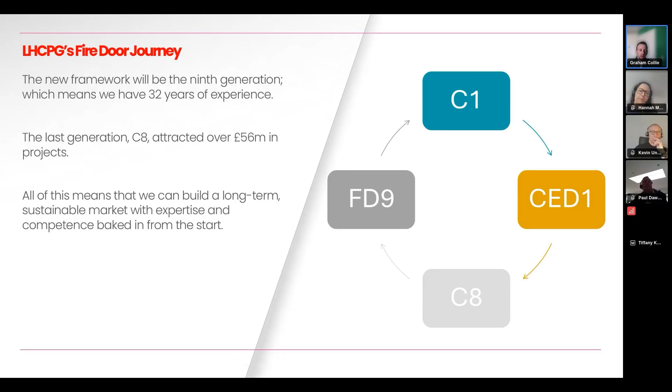Finally, before I hand over to Paul, it's been a journey with this framework. We started the tendering process in September, but as Paul will allude to, there's been some hand-holding required. So we're a little behind schedule, but we're currently going through factory assessments. That sets us apart - we actually go to the factories of all the manufacturers that apply to our framework to check they're doing what they say they're doing. We're one of the only framework providers that do that as well. So we're completing that.

This framework launches in July, so we'll have a new compliant route to market for all the needs from that side of things. So that's it for me. I'm going to hand over to Paul, who's going to take you through a little bit more of the journey on the technical side. Thank you very much.

Thank you, Graham. My name is Paul Dawson, I'm Group Technical Manager at LHC Procurement Group based in Uxbridge. As Graham has already alluded to, we have our regional business units, which ultimately support our clients and contractors within those regions. Just a brief history of myself - I'm still involved in skills and standards development, education and lecturing, and I'm still out there doing contracting as well as working with LHC Procurement Group developing our construction frameworks.

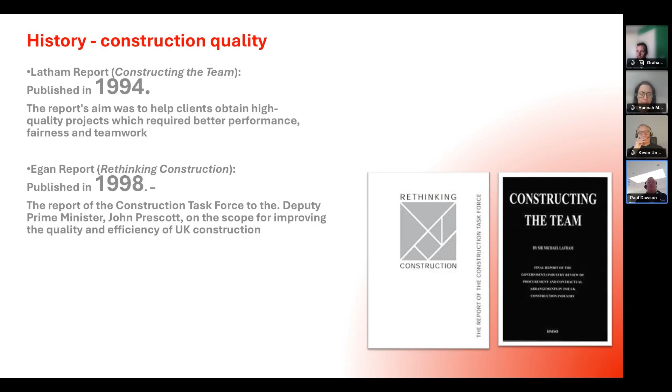So a bit of history on construction quality. Anyone who's done anything academia-wise within construction will remember the Latham reports, the Egan reports, and obviously the outcome from Grenfell. There's a common theme that goes through all of these, and every time it's quality, quality, quality, quality. The industry could do better, we could collaborate better, we could be more transparent - it's just a common theme that goes through. But the two I've mentioned, the Latham report and Egan report, go back to the 90s, which is a chunk of time ago.

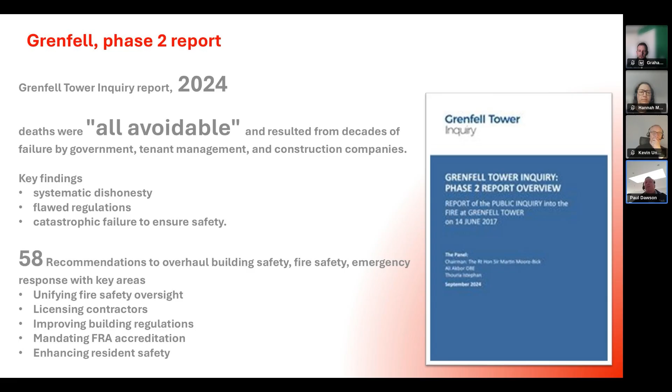Grenfell, as I've just mentioned, the phase 2 report outcome was that everything was avoidable. There were 58 recommendations that came out of the report, looking at improvements within the industry, improving regulations, mandating fire risk assessments, accreditations, enhancing safety. And then there were the key findings: systematic dishonesty, flawed regulations, catastrophic failures to ensure safety. Hopefully, as I go through some of the slides and the other presenters are here, we can talk about what we are doing to change this and make sure it's a quality-driven, safe industry.

The Building Safety Regulator was established after Grenfell to look after safety in high-risk residential buildings. That has now kind of moved from HSE ownership into a separate management, but it's there in order to ensure safety moving forward.

The C8 and FD9 ethos, Graham's already alluded to how we've evolved our products over the last 32 years. We look at within our fire doors, certainly on the FD9 framework, we look at the full 360 review of not only the products, but also of the installers. So we are the only framework provider that goes out to look at manufacturing processes.

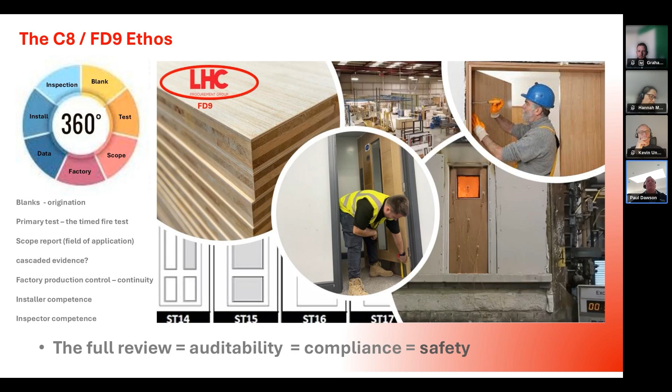So as I say, we look at the full sourcing of the products, make sure they're manufactured in accordance with the accreditation agreements, make sure that we have a compliant door set that comes out the factory, but also looking at the competency and qualifications of the installer, bearing in mind that the installer's third-party accreditation is separate to the manufacturing accreditation, so we look at that as well.

The questions, if it all does go wrong and you're in the court, you will be asked these questions. Did you know about the golden thread? Do you have accurate data? Can you trace the auditability of your products? Are you aware of the deviation from scope of the products? Why do you accept the use of another's accreditation, etc.? The list goes on, and you will be expected to answer these questions.

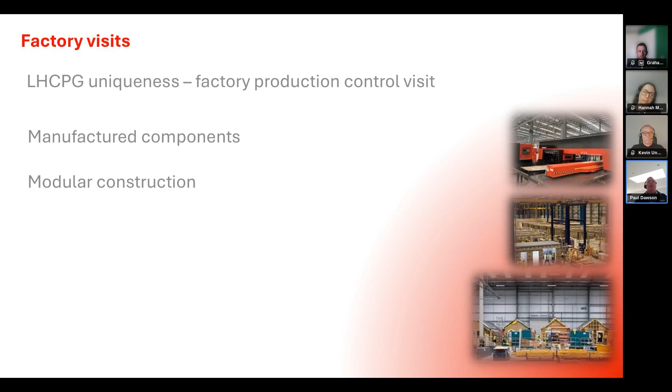As I mentioned, the factory visits, we've been out, we look through the factories, we ensure compliance of the products against the approvals that they have. We look at the quality management, the safety, and ultimately make sure that when a product goes out of the door of the factories, all the component parts are as the tested door assembly, and they're not mix and matched, which could give rise to early failure.

We check for unauthorized modifications. We verify the hardware compatibility. We look at the certification, the labeling, the traceability, the integrity of the products, the glazing, the aperture size, and training, and we match all of that against their field of application scope assessments and documentation for the products that have been approved.

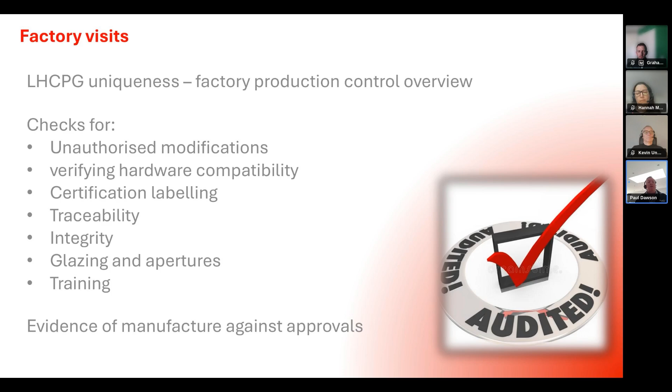A quick little list of what we look at. We look at the sustainability, traceability, responsibility. We look at consistency of the build quality to make sure that the door assemblies or door sets that come out of the factory are the same any day of the week, any time of the day, any time of the month, any time of the year. They're all built to the same quality standard and approvals.

And we also look at gateway processes to make sure that where we do walk through a factory, if there is anything - say a CNC machine is a little bit out of calibration, and the locking mechanisms or the spy holes or something is not quite right - it is absolutely picked up and quarantined and taken off the production line, so the manufacturer doesn't put not-to-standard door sets out there on the market.

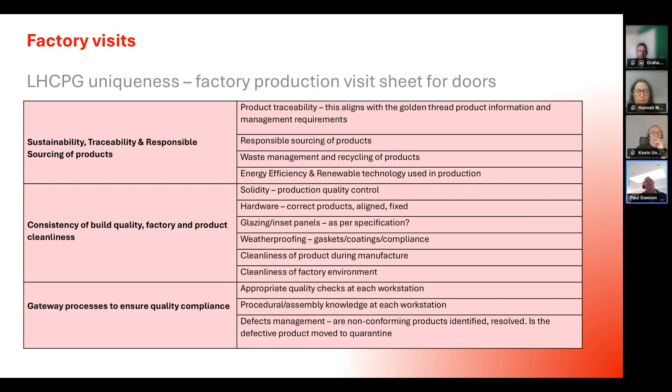Contractor competencies I've run over. We look at the skills, experience, knowledge and behavior. Behavior is a big one. We look at the organizational capability, the technical proficiency, the management systems, the compliance. We look at change management compliance and ethical conduct. A lot of the contractors have been with us for a good number of years now, and going back to the gold standard, we build those collaborations, and that's how we can move forward with improving quality.

Forms of compliance, how do we check it? We look at declarations, certifications, accreditations. We make sure they're in date. We make sure they're third party endorsed. We look at information statements, records. We look at reporting plans. We look for, as I mentioned earlier, gateway compliance. We look for change control, management structures, and probably one of the big key ones is subcontractor management as well, to ensure that everything is appropriately managed and quality remains forefront. And obviously third party audit and inspection evidence is absolutely key as well.

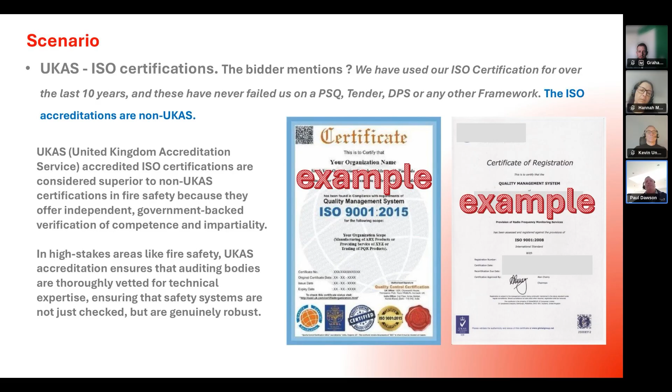Scenario here: I need some fire doors fitted. We've got the golden thread of information, and we need to know the whole history of those products. We need to know, as I say, the sourcing right the way through to any alterations, installations. We need to know all of the data, all of the time, within those products that are installed. So we do take these requirements seriously, and you absolutely need manufacturer test reports, data sheets, third-party certification for fire doors, etc. We need to know, or we will assess the products and make sure that you are getting what you're paying for.

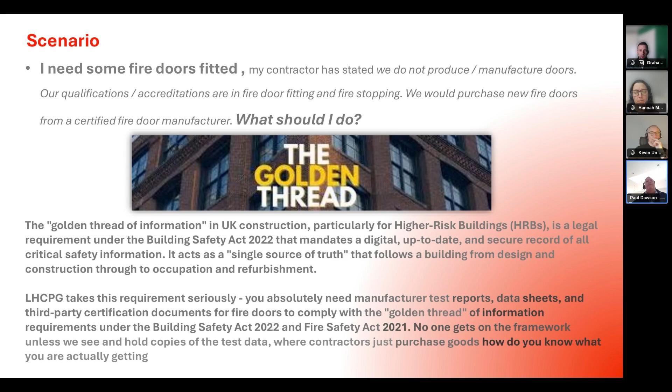A scenario here, I've got a certificate from a contractor. These are real scenarios that we're having when doing this evaluation for our fire door framework. They've stated that as a Q-marked approved fire door installer, they are audited biannually, and their certificate is awarded based on meeting the BM TRADA requirements.

Every scheme is granular. There's a couple of standards here. The STD 052 is the fire door installation standard, but the 058 is the third party inspection and maintenance. They're separate, so it's not just a case of having a certificate and being able to do anything - it's individually certified.

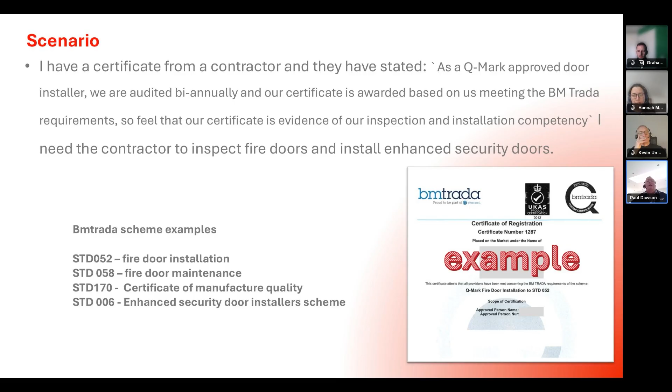Another one here, the contractors have provided this primary test evidence for fire doors. This effectively is a field of application, and it will cover a whole raft of products. When you read through, this is an engineering assessment that the products' expected fire performance will comply - it's not primary test. This is again what we're getting in place of primary test, so we throw these back and say no, we want the primary test.

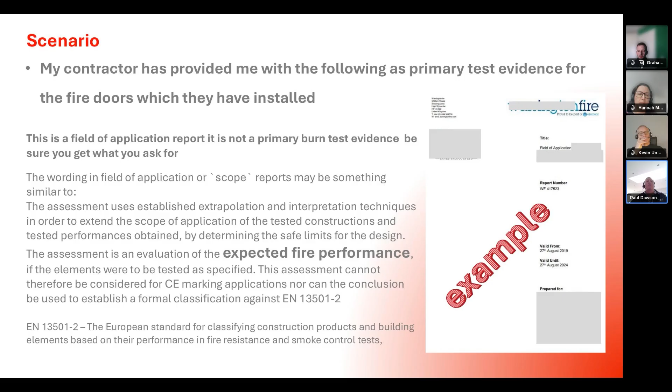Closing thoughts - LHC goes through a rigorous, robust process to ensure that the products you get with your fire doors are what they are, and will serve the purpose over time. But we do an audit assessment up to a moment in time, up to when they're appointed on the framework. We can support with call-offs and projects if asked, but as a client, you also need to take some ownership from when those contractors are on site, to make sure all the good work we've done continues through on the install.

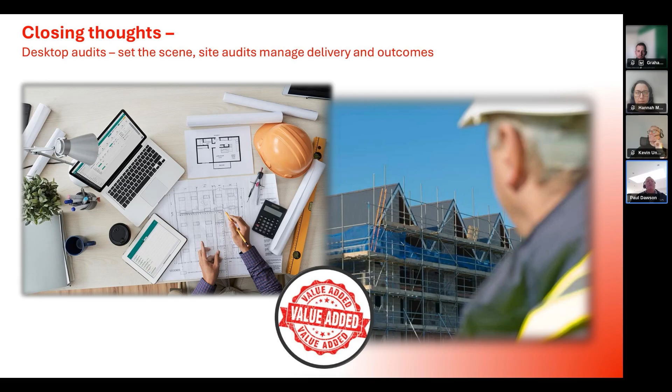And on closing thoughts, the Building Safety Act has basically changed the rules of the game. It's not about what you can do now, it's about what you can prove. We're here to help you through this compliance headache. And that's my slides, and I shall now hand over to Hannah.

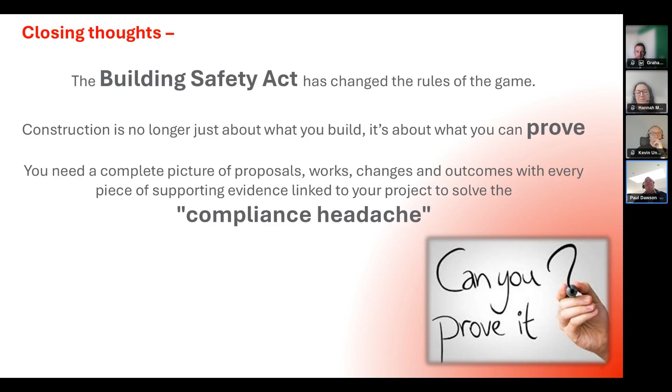Hello everyone, my name's Hannah Mansell and I'm a design engineer, but I've worked in the fire door sector in many different guises - product design, testing, getting products certified, etc. I run a consultancy called Adorability, and I'm also facilitator for the UK Fire Door Think Tank, which is a not-for-profit all about collaborating and looking to future-proof safety within the sector.

So I've got some questions for the audience to start off with. My job here is to illustrate some of the themes that Graham and Kevin have been speaking about. But four questions for you first. The first two are to consider where we are now and to look back - what impact do you want to have within your work? And if you were to fast forward 30 years, what sort of legacy do you want to leave within the building safety landscape?

And the next two questions, cast your mind forward. Let's consider future innovations and maybe the new materials starting to emerge in the fire door world - but what do they mean for the next area of emerging risk or focus for the industry? And then looking at the whole building safety landscape - what's keeping you awake at night? What worries you most? And what collaboratively could we do together about it?

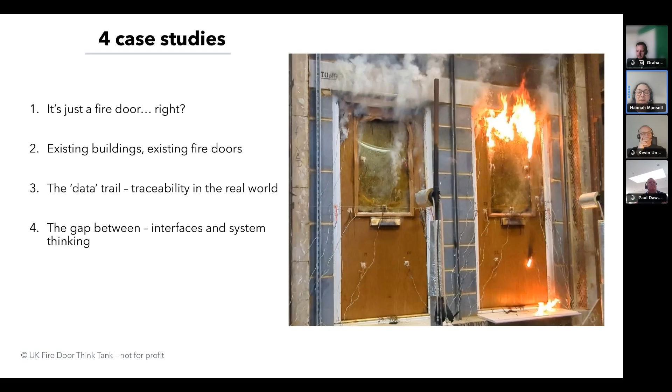So, I've got four case studies. They're very quick, but I want to illuminate some of the themes my colleagues are speaking about. The first one is: it's just a fire door, right? The second is the approach in existing buildings and dealing with existing fire doors - where do you really start? The next one is all around the data trail - I used to call this the paperwork trail, but shifting over to the data trail - this is about traceability in the real world, what it does give you and what it doesn't, and then the gap in between. I spend a lot of time considering the fresh air, the gap in between different systems of building construction. I want to leave you with a thought about interfaces and system thinking.

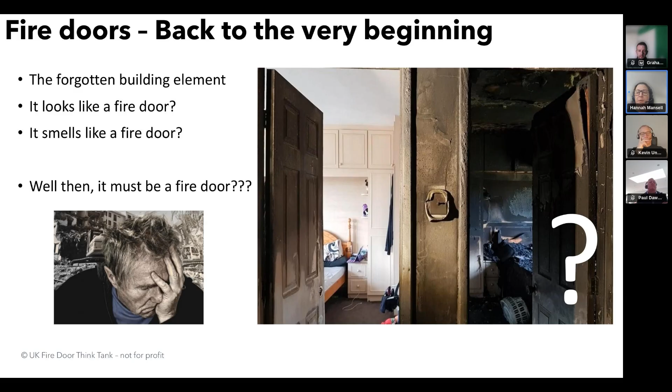So cast your mind back maybe 10 or 15 years ago, and you'll consider that awareness around the role of fire doors was not really very high. Of course, great fires such as Grenfell since then have really focused the mind, and there's a growing awareness. But what was the landscape like before Grenfell? It was really full of assumptions - it looks like a fire door, it smells like a fire door, and you'd probably find someone prepared to put their name by that. But of course, we understand these products and systems in completely different terms now.

Now, Kevin, who's on next, is going to really go into some detail around these subjects, but there's a whole lot of huge challenges facing the sector at the moment. The removal of the national classes, the transition from BS to European frameworks and classifications, of course the Building Safety Act and the Building Safety Regulator, but particularly the planning approval gateways, the different role of the duty holders, the clients, the principal designers, and the principal contractors.

But equally, for someone like me, I spend a lot of my time with the specialist subcontractors, specialist designers who are really bringing the details of the system together. Fire door works, of course, majority of the time notifiable to building control. And how do we consider the emerging competence of both the individual and the organisation in this space?

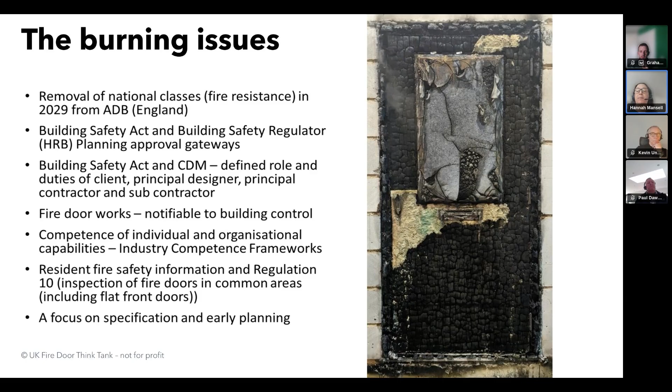There's a little bit here about information as well. The need to provide residents fire safety information, including around their fire doors, and of course the regular inspection of fire doors in common areas. So really the learning from this slide is that there's a huge focus on the specification and the early planning and due diligence of these products.

So the first one for you, it's just a fire door, right? So have a look at this image on the screen. So it's just one that I've sketched for you. And you're probably thinking, Hannah will never make it as an architect. But it's just a simple layout of a made up building. So this one's a residential building. You can see all of our individual apartments and you can see all of these different fire doors.

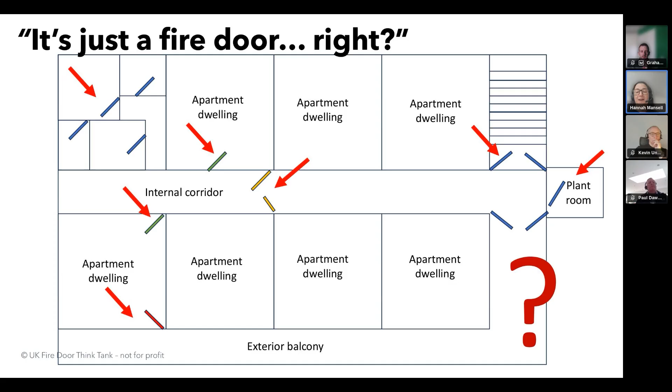Now, of course, we would hope that they weren't all open at the same time. But I've highlighted them to start to express that depending on the function and the location and how that door is being used and what it's got to protect, it can have a vastly different specification. So someone turning up saying, Hannah, I need a 30-minute fire door, doesn't really answer the question, does it?

So moving on, there's a lot on this slide. So just take your eyes to start with to the top right-hand corner, the secret life of fire doors. So we don't often see them doing their job in a fire. But what we want fire doors to do is all around compartmentation of the building, keeping the fire in one place for as long as possible so that we can have a safe evacuation or until the emergency services come to bring the fire under control.

But of course, in other buildings, like complex, maybe large buildings, large number of people, we wouldn't be able to do a safe and quick evacuation. So fire doors can also provide the role of creating safe refuges within the building until the fire is brought under control. And of course, all of those routes out of the building, the corridors, the stairwells, these are the routes out of the building for those escaping. However, they're also the safe routes in for the emergency services. So we need to keep those routes clear and safe.

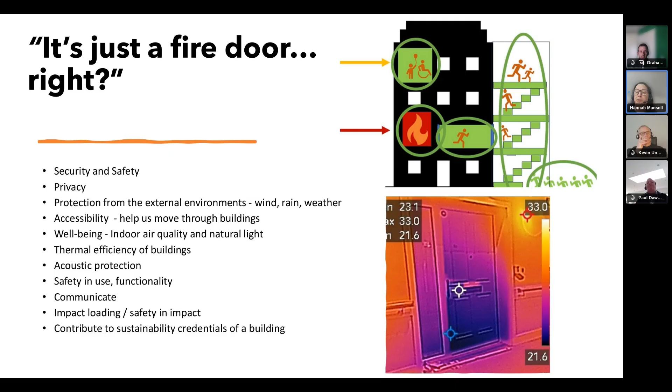But that's almost the secret life of a fire door because we don't often get to see them doing that. So just cast your eye to the rest of the screen. I'm not going to read through this list, but just take on board that most fire doors have got multiple performance characteristics. And really the learning from this slide is you can't go after one of those performance characteristics at the great cost of another. So you need to consider them as a holistic approach. And again, you'll probably think, I'm not going to read my way through this slide, but just have a scan through.

Getting down to a little bit more foundational knowledge, the materials and components that go into fire door systems these days are a lot more complex. It can actually go to hundreds of different components, and these are all working together as a system. So although it's really useful to understand the performance of each different component and how it contributes to the system, it's the system performance that we're also interested in.

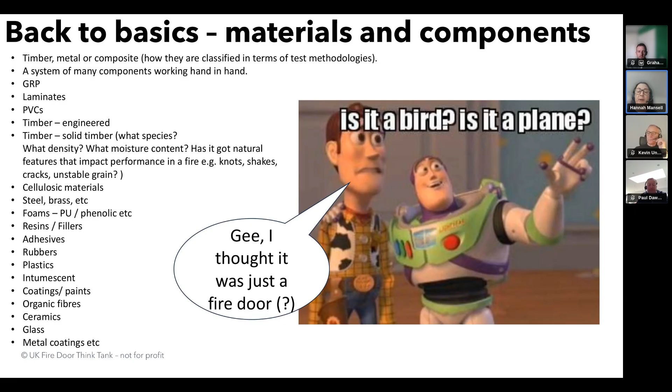Now, Graham touched upon it earlier. We would all want to walk into a building and find that there was a complete documented building history from the last decades, but more often than not, that might not be the case. So really, my experience is that in existing buildings, it can be a real case-by-case approach to understand what history exists and also what are the current needs of the users of the building.

Considering those can actually help define a specification very early that answers a lot of requirements from a 360-degree view. Moving on to that data trail, the images on screen are a collection from my travels, showing a few traceability marks you'll probably be familiar with seeing.

My point with this slide is that there is on-product traceability, and it's quite widely used in the fire door world. There are also digital methods out there as well. But this type of traceability is just a starting point. It certainly doesn't tell you the whole process, the background supporting information, or the performance of that product without further investigation. So on-product traceability may only take you so far.

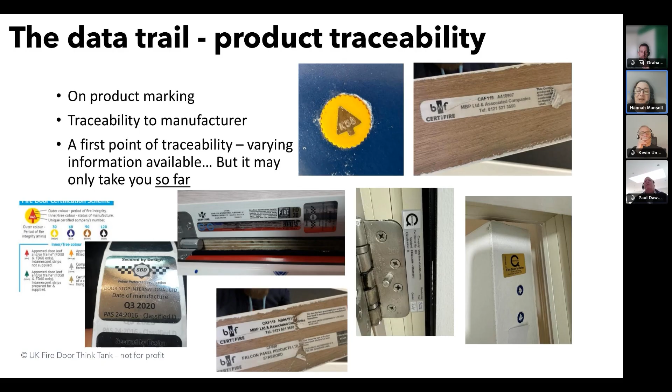In the next couple of slides, I'll explain that a little better. On this slide you can see a nice, neat process flow, and Graham gave a good introduction to this earlier. This starts to show the different ways products can move through the fire door sector.

Starting as components and raw materials, being put together with different types of components such as blanks, leaves, and frames, it can pass through the hands of fire door processors or fabricators and be placed on the market in a wide variety of ways.

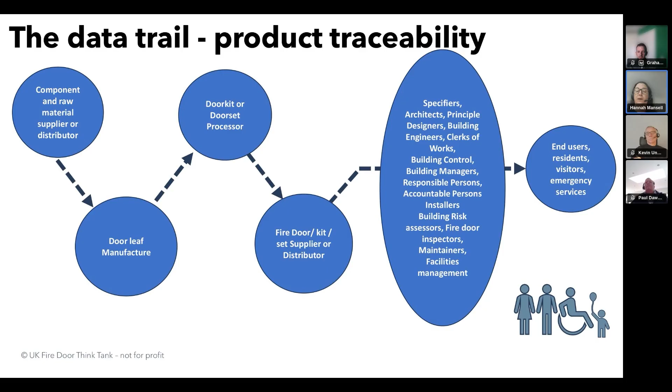Moving across to the right-hand side of the screen, you can see a load of other different stakeholders getting involved at these stages. Each of those individuals probably needs to know different information about the product. And of course the end users, often forgotten about until too late, but early engagement with them can really help define the specific requirements and save issues later on.

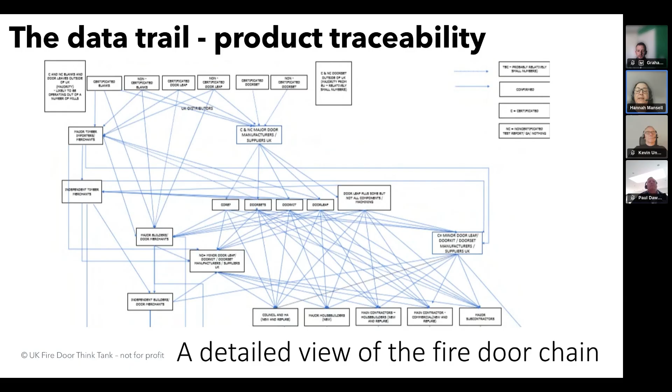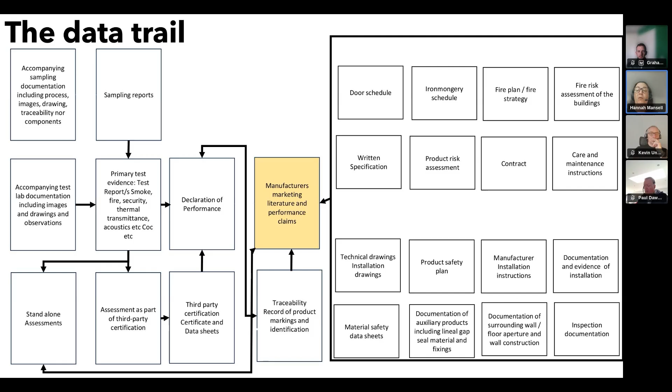Often on projects, that's the first piece of information you get to see. But take on board that it's certainly not the whole story, and deep dive due diligence is likely needed into a whole portfolio of data.

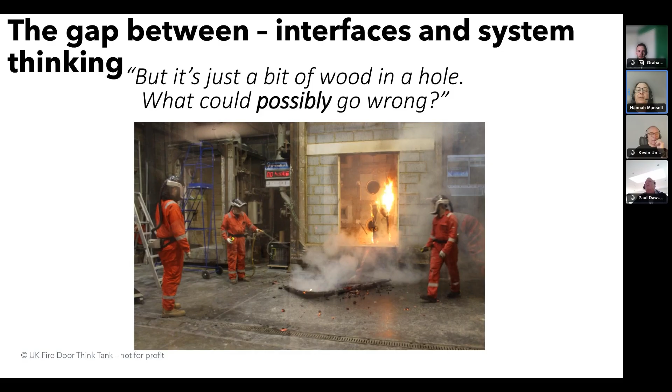So just to leave you with a couple more points: the gap between interfaces and systems thinking. Many people think fire doors are simple products and consider them in isolation, even down to looking at test evidence of the system or compatibility between ironmongery. But it's actually a wider topic—it's not just the system of the product, but the system within the building and how it interfaces against different building structures and services.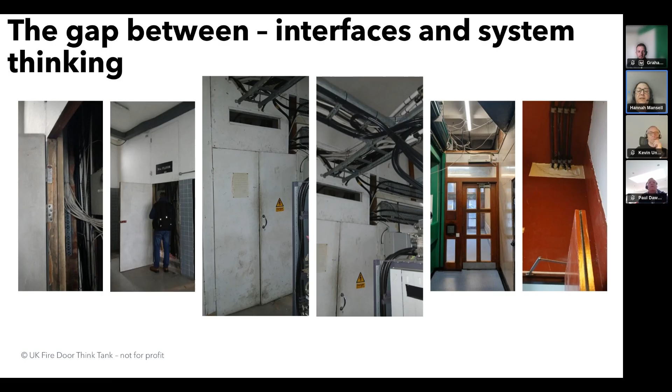Here are a few more images from my travels. As you can see, in real life situations, particularly in existing buildings, we're often dealing with a whole load of different interfaces and penetrations where building services pass through. So the learning from this slide is not to just look at the product, but to look at its surrounding construction, consider how it's sealed into the aperture, and consider all the other services and penetrations likely to be near it.

So just a few key learnings to leave you with: thinking about the product, it's not just about the product itself, but also about that 360-degree performance that helps you define the product specification.

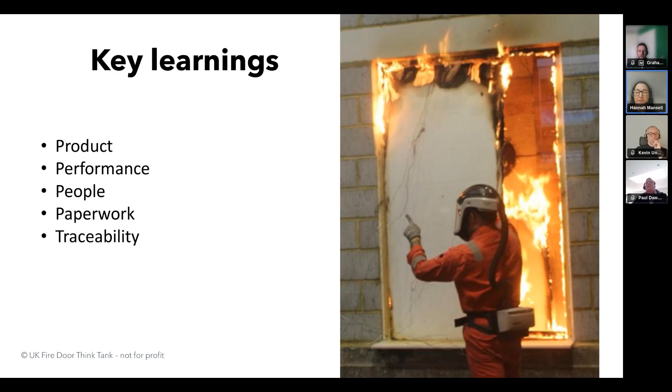By putting the people and their requirements, the end users and all of those stakeholders front and center in your specification decisions, this should help you answer the specific requirements of what they need and actually save a lot of time and probably budget later on. I've called it paperwork here, but think about the traceability, think about the data trail. And of course, these documents are not just to be sourced from various parties and recorded forevermore. There needs to be a really strong and robust process of due diligence to make sure that they are absolutely relevant to the product which is being supplied on site.

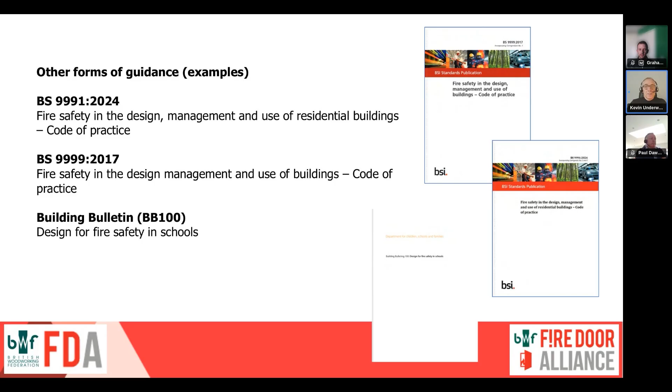Now, as a consequence of the Building Safety Act, we've seen secondary legislation come into place. I thought it's very useful to look here at the guidance in relation to the Fire Safety England regulations, and particularly Regulation 10, which puts emphasis on compliance for fire doors. Now, this is linking into another piece of regulation, which is the Regulatory Reform Fire Safety Order, or just the FSO, which looks at the responsibilities of responsible persons in maintaining fire safety in the common areas of buildings. And it's particularly useful because it puts emphasis on the function of the fire doors.

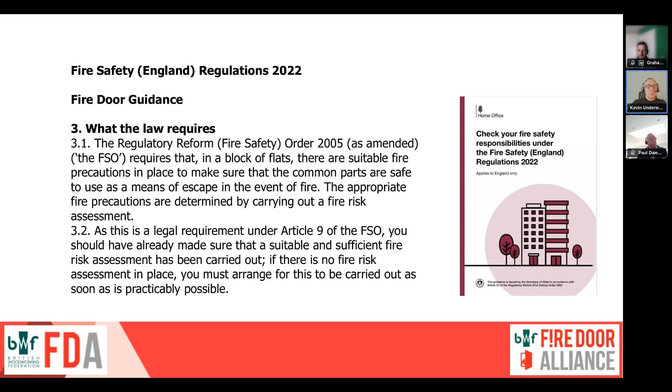So we see here that it starts off by setting a baseline, where the responsible persons need to ensure that they have a suitable and sufficient fire risk assessment, and that if there is no fire risk assessment in place, they need to arrange for this to be carried out as soon as practically possible. So they're establishing a baseline for the performance of the fire safety in the building.

Now, these are legal requirements under Regulation 10 of the Fire Safety England regulations. So what do they need to do? Well, fire resisting doors are one of the most important measures to safeguard the means of escape from fire. The fire risk assessment should already have identified the doors in question and determined whether the doors are adequate to resist the spread of fire and smoke into or within the common parts. And they should have already taken steps to maintain the doors in good order, and where it has been found that the existing doors are inadequate, they need to be replaced, and this must be done by a competent person.

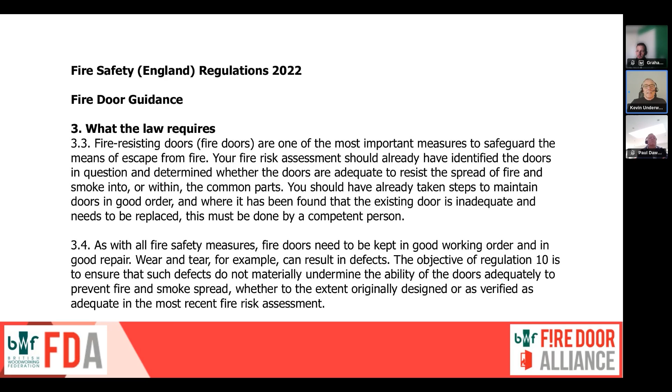As with all fire safety measures, fire doors need to be kept in good working order, in good repair. Wear and tear, for example, can result in defects. The objective of Regulation 10 is to ensure that such defects do not materially undermine the ability of the doors to adequately prevent fire and smoke spread, whether to the extent originally designed or as verified adequate in the most recent risk assessments.

There is a requirement to provide information to residents. Residents have an important role to play, ensuring that if there is a fire in a flat, the flat entrance door is an effective barrier to the spread of fire and smoke into common parts. Regulation 10 requires that residents are given information that fire doors should be kept shut when not in use. They should never be propped open. Residents or their guests should not tamper with self-closing devices, and residents should report any fault or damage immediately to the responsible person. Remember, that's the duty holder under the Fire Safety Order.

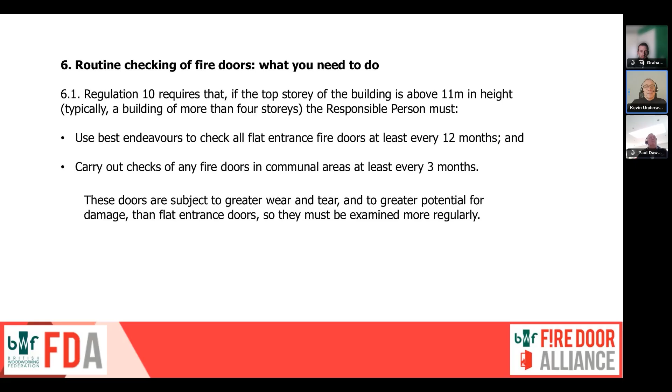For routine checking of fire doors, Regulation 10 requires that if the top story of the building is above 11 meters, so that's about 4 stories in height, typically a building with 4 stories, the responsible person must use their best endeavors to check all flat entrance doors at least every 12 months, and carry out checks of any fire doors in communal areas at least every 3 months. The doors in communal areas are subject to greater wear and tear and to greater potential for damage than the flat entrance doors, so must be examined more regularly.

So the recommended checks - this is in the guidance document around applying Regulation 10. They should check that the resident has not replaced an existing fire-resisting flat entrance door with a new non-fire-resisting door. This may sound strange, but particularly in balcony access doors where the flat entrance doors are on the outside, they're external doors. This has been the case where residents replacing the doors have just assumed that they can replace it with a standard non-fire external door set. That's not the case - they do need to have elements of fire resistance.

Letterboxes should firmly close and not be jammed open. When a letterbox has been fitted to a door that has not previously had one, the resident will need to confirm that the new letterbox is suitable for use in fire-resisting doors and has been fitted by a specialist contractor. The door should be one that's suitable to receive a letter plate, not just whether the letter plate is fire protected, and any intumescents are fitted also. That's why it should be fitted by a specialist.

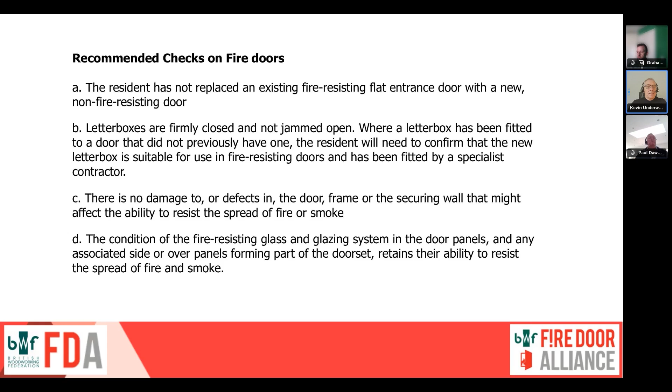They should look to see that there is no damage to or defects in the door frame or the securing wall that might affect the ability to resist the spread of fire or smoke. The condition of the fire-resisting glass and glazing system in the door panels and any associated side or over panels forming part of the door set retains their ability to resist the spread of fire and smoke.

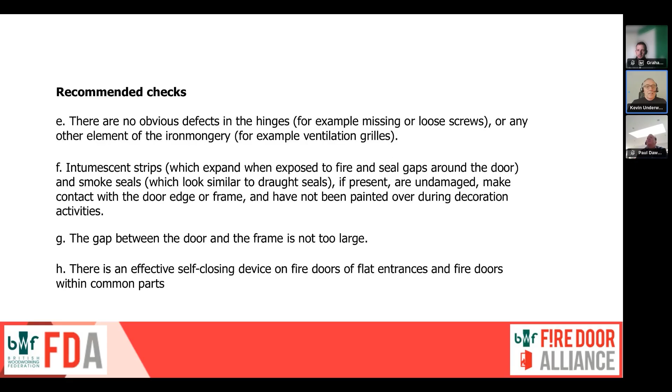There should be no obvious defects in the hinges, for example missing or loose screws or any other element of ironmongery. Intumescent strips, which are those parts that expand in the event of a fire and close the gap between the edge of the door and the frame, and smoke seals, which don't have to respond - they're active when there is ambient temperature, it doesn't have to be a high temperature - if present, are undamaged and make contact with the door edge or frame and have not been painted over during decoration activities. The gap between the door and the frame should not be too large, and there is an effective self-closing device on fire doors of flat entrances and fire doors within common parts.

In some premises, corridor and lobby doors might be held open on magnetic hold open devices. For this to be the case, there would need to be smoke detectors, activation of which could cause a door to close. Care should be taken when checking the self-closing devices on these doors to use the test button provided, and not to just pull the door from the magnet.

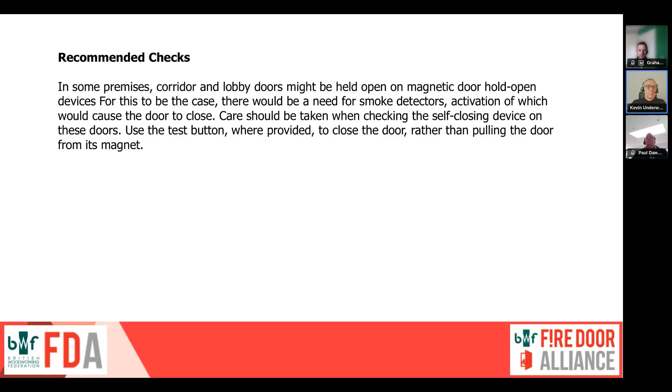So, specifying fire door requirements. Key characteristics of a fire door are fire resistance and smoke control, but they will have other performance requirements. I think Hannah covered this quite extensively in her presentation. So just again, making the point that fire doors have other functions, and the other functions should not compromise its ability to provide fire resistance and smoke control.

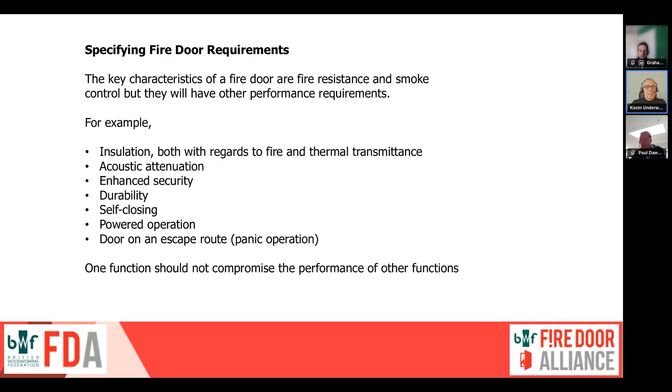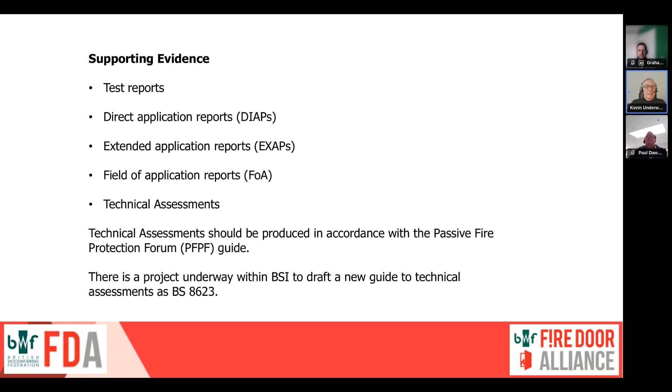Supporting evidence, of course, test reports are the base evidence, but we would consider direct application reports, extended application reports, field of application reports, or other technical assessments. The technical assessments should be produced in accordance with the Passive Fire Protection Forum PFPF guides, and there is a project underway within BSI to draft a new guide to technical assessments, BS 8623.

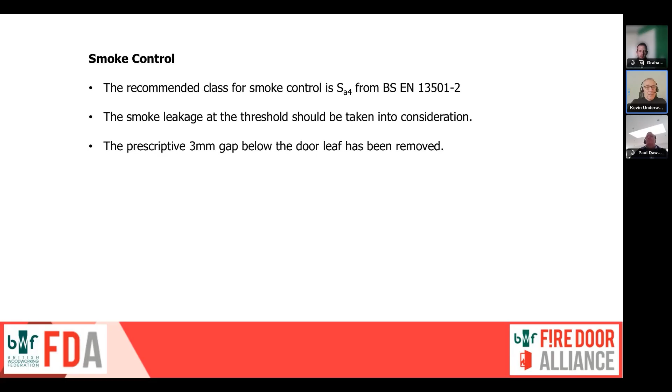Smoke control - the recommended class that we're looking for moving forward is SA4, when classified against EN 13501 Part 2. That's just looking at four-sided smoke control. It's not applicable in the building regulation guidance at the moment, which refers to smoke control at the head and jambs only.

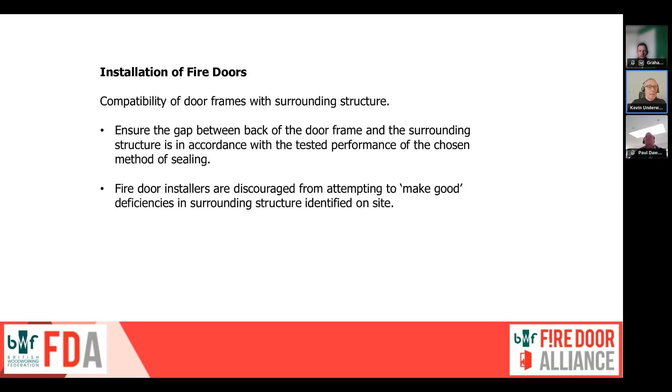Installation of fire doors - the supporting structure should be able to support the installation of the fire door. Fire door installers are discouraged from attempting to make good any deficiencies around the surrounding structure that may have been identified on site. It's not the fire door installer's responsibility to undertake design work and building work to make openings right for receiving fire doors.

When installing a fire door, you should ensure that there is correct sealing between the frame and the supporting structure, and the sealants or any foams, linear gap seals that are used should have been appropriately tested and proven.

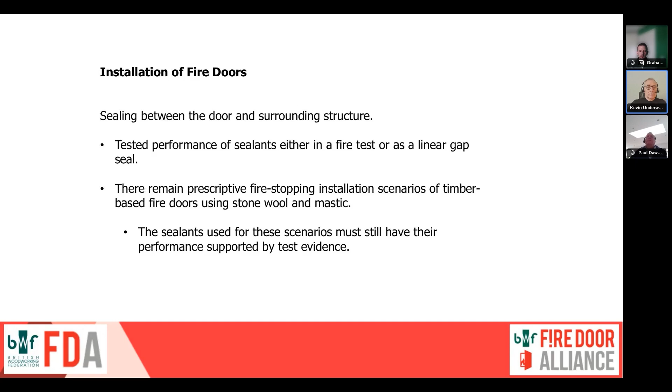Moving on to building regulations - Hannah mentioned this in her presentation, that installation or work on fire doors is building work. If it's either going to be covered under the original construction, under the original building notification, or if it's just replacing fire doors, then this could be considered a material alteration, which again is building work.

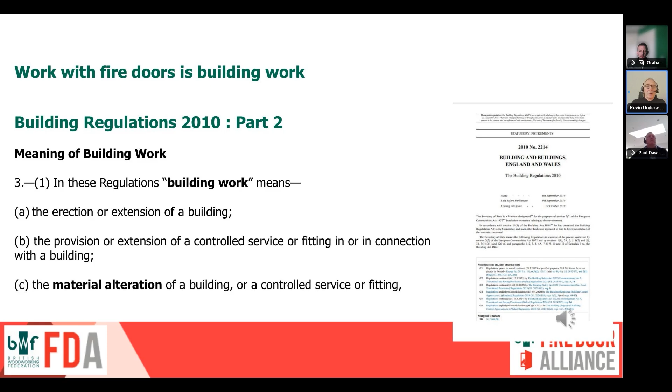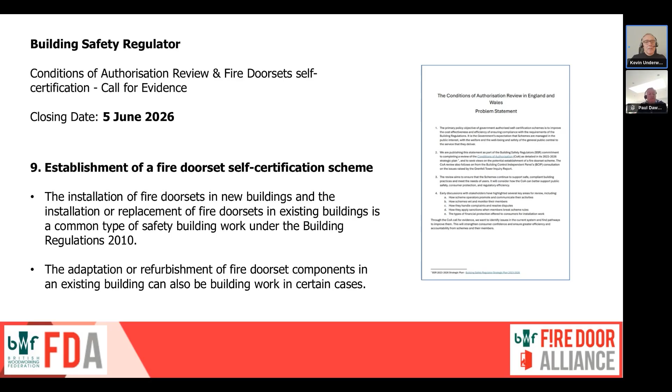We also have at the moment a call for evidence from the Building Safety Regulator under the heading of conditions of authorisation, review and fire door set self-certification. This is looking at a competent person scheme or self-certification scheme for signing off the installation of fire doors, because this document states that replacement of fire doors is building work and should be notified to building control. It also says some maintenance work on fire doors would also be considered building work. So in most cases, when installing originally or replacing fire doors, building control must be involved and they can oversee the work taking place.

Because building work is taking place, Chapter 3 of the Building Regulations 2010 for England requires that people undertaking building work are competent. So we now have a legal requirement that where a person is an individual, they have the skills, knowledge, experience and behaviours necessary to do that work. Or where the person is not an individual, they have the organisational capability to carry out the building work in accordance with all relevant requirements.

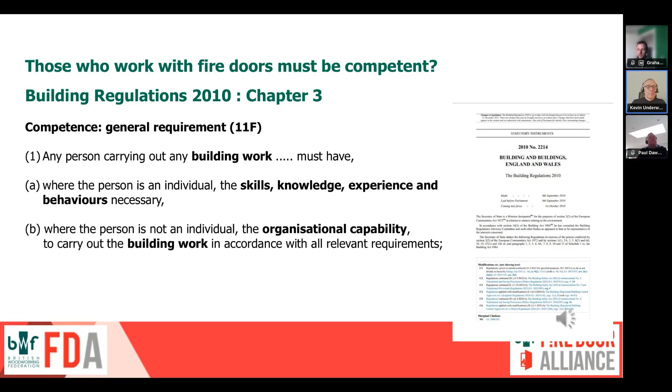How do those who work with fire doors demonstrate their competence? The Building Safety Act established the Industry Competence Committee, the ICC. This was formed to provide strategic leadership, assistance and encouragement to facilitate the improvement of competence in the built environment industry. It advises both the Building Safety Regulator and the industry on matters of competence.

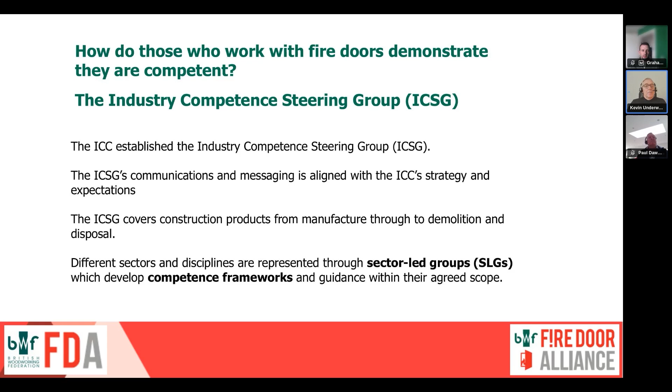The Industry Competence Steering Group, then. The ICC established the Industry Competence Steering Group. The ICSG's communications and messaging is aligned with the ICC strategy and expectations. The ICSG covers construction products from manufacture through to demolition and disposal. Different sectors and disciplines are represented through sector-led groups, the SLGs, which develop competence frameworks and guidance within their agreed scope.

If you want more information on the work of the ICSG, I would direct you towards the BSI's Communities Built Environment Competence Hub. This is managed by BSI and developed in collaboration with the ICSG and the Building Safety Regulator. The hub's aim is to simplify a complex competence landscape by bringing trusted knowledge and resources together in one place, making it easy for every member to find what is important to them.

Sector-led group SLG 10.1, the installer and maintenance of the envelope. This group was established to address installer and maintenance competence issues in the envelope installer sector, focusing on the development of competence frameworks. It oversees 33 groups across 5 categories, including fire doors.

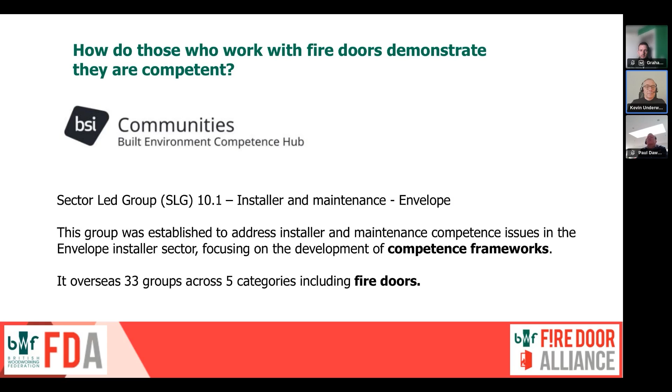I just thought I'd finish by looking at the golden thread. We've looked at the importance of information being maintained throughout the life of a building, and the Grenfell Tower inquiry, the previous reports, and the secondary legislation following the Building Safety Act put in place the requirements for the golden thread. A good guide on the golden thread that I found is one issued by the Construction Leadership Council, which defines the golden thread.

It should be individual, bespoke and specific to a building and a group of residents or occupants. It should be continuous, holistic and requires a chain of responsibility - for example, clarity on who is responsible for updating the information. It should be electronic information about the building that is created, obtained, updated, maintained and shared, along with the information and processes that enable the right decisions to be made by the right people, all the time.

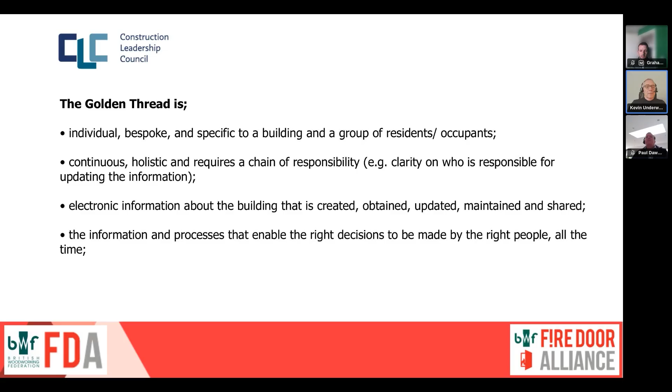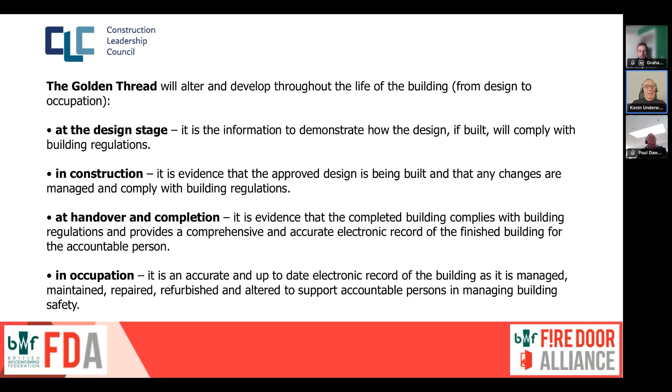The golden thread will alter and develop throughout the life of the building from design to occupation. At the design stage, it's the information to demonstrate how the design, if built, will comply with regulations. During construction, it's evidence that the approved design is being built and that any changes are managed and comply with building regulations. At handover and completion, it's evidence that the completed building complies with the building regulations and provides a comprehensive and accurate electronic record of the finished building for the accountable person - the accountable person being a duty holder under the Building Safety Act. In occupation, it is an accurate and up-to-date electronic record of the building as it is managed, maintained, repaired, refurbished and altered, to support accountable persons in managing building safety.

So that's the end of my presentation today, and thank you, and I'll hand you back.